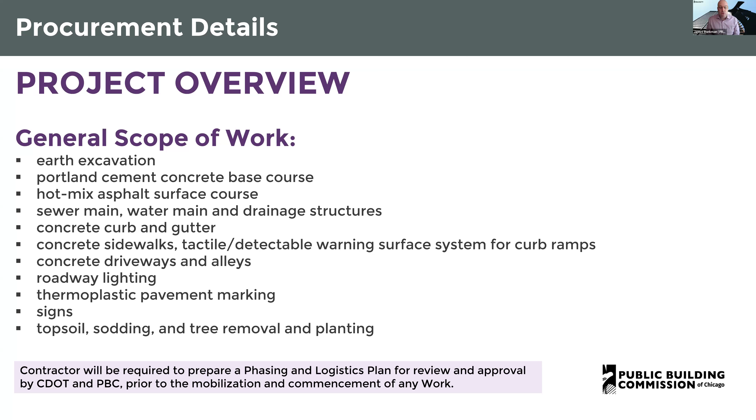We'll briefly discuss this now, but in Robert Ochi's presentation in the tech review, we'll go into detail about the specific portions of the scope of work we want to highlight for each project. As you all know, the contractor is required to prepare a phasing and logistics plan for review by the PBC and CDOT prior to any mobilization or commencement of work on these projects.

The time of completion is as follows: substantial completion no later than October 31st, 2025. There are two scheduled milestones. The first is the permitting of mobilization and site control - work may not commence sooner than February 11th, 2025. The second scheduled milestone involves the landscaping, the fall planting season - work cannot commence any sooner than October 1st, 2025.

Failure to achieve these scheduled milestone dates results in the following liquidated damages: $1,000 per day for failure to achieve substantial completion, and $500 per day for failure to achieve each of the milestone dates. All the documents are available.

Is someone off mute? Have a question?

All of the documents are available on the PBC's current opportunities page, located right on the PBC's website. You simply go to current opportunities and then find contract C1617, the WPA Street 112th and Loomis page. All of the plans, the tech specs, what we call Book 3, are available from Aloha Print Group. Simply click on alohaprintgroup.com/planroom C1617.

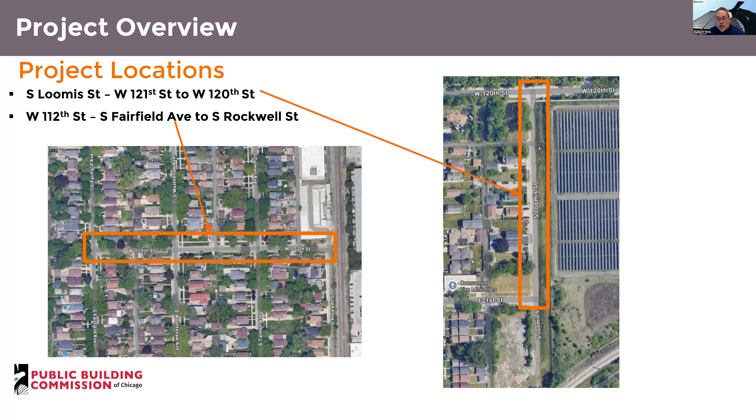Thank you, James. So as James had mentioned, there's two project locations. South Loomis Street is the first project, and West 112th Street is our second project. So you can see those identified in the little screenshots there. We'll start with South Loomis Street, basically from West 121st Street to West 120th Street.

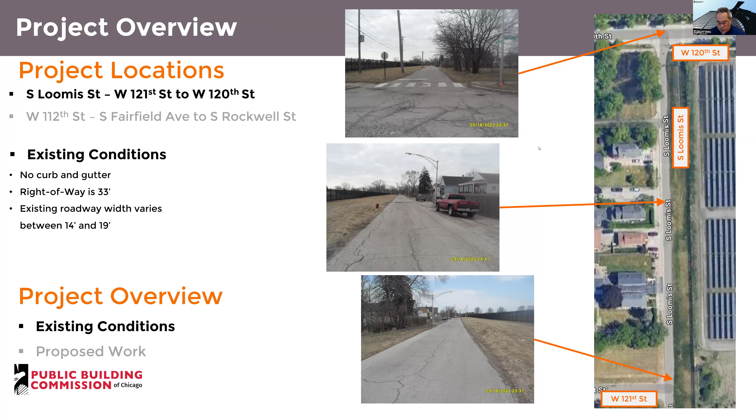Existing conditions, as you can see a couple pictures there. Existing roadway pavement and west parkway are in poor condition. No curb or gutter, leading to inadequate drainage. Right-of-way is only 33 feet. Existing roadway width varies between 14 and 19 feet. Primary residential, Exelon generation solar field property is adjacent on the east side of our project site.

There are sidewalks, but they are in very poor condition on the west side of the project site. There were 4 driveways and 1 alley apron within our scope, and vehicles are currently parked in the West Parkway, as you can see there on the overhead view.

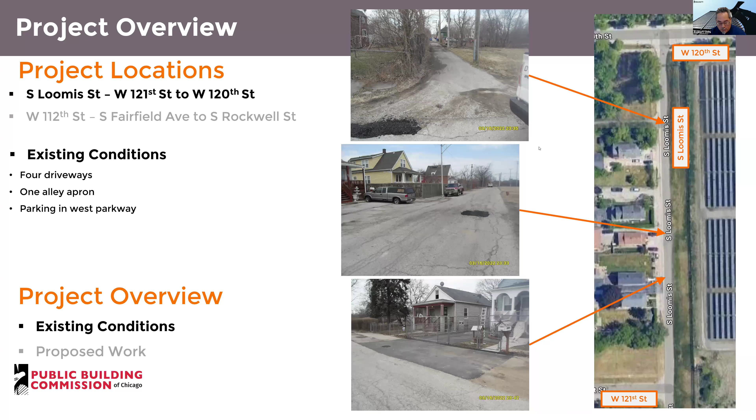If you go to the next slide, this has to do with environmental reporting. The environmental report can be found in Book 3, Appendix C, Part 2 of our contract documents. There are 2 borings sampled, and the soil disposal classification is landfill, non-special waste.

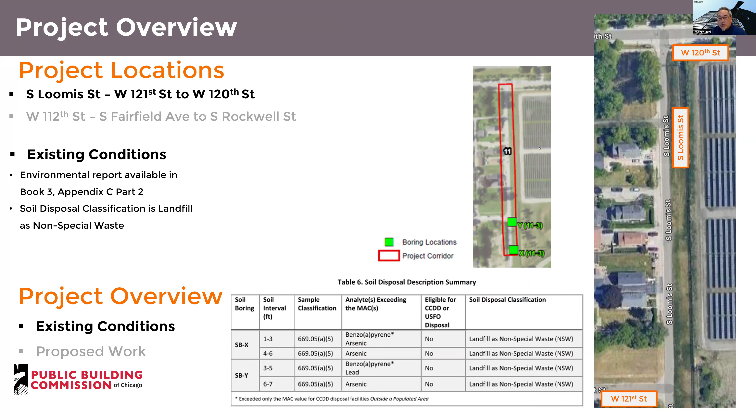We get to the proposed scope of work. This is a full depth pavement reconstruction project. Roadway to be 18 feet wide with curb and gutters. There are 2 catch basins to be installed with 6 feet total of lateral 8-inch ESVCP to connect to the

existing 24-inch sewer to remain. There is 1 manhole. There's 36 feet of 18-inch ductile iron pipe and 19 feet of 24-inch ductile iron pipe to be replaced at West 121st Street due to water main work.

Reconstruction of 1 alley and 4 driveway aprons are part of the scope. Construct 5 parallel parking stalls as shown on the plans to allow for parking on the west side of Loomis. And we are reconstructing 2 ADA corners at 120th Street.

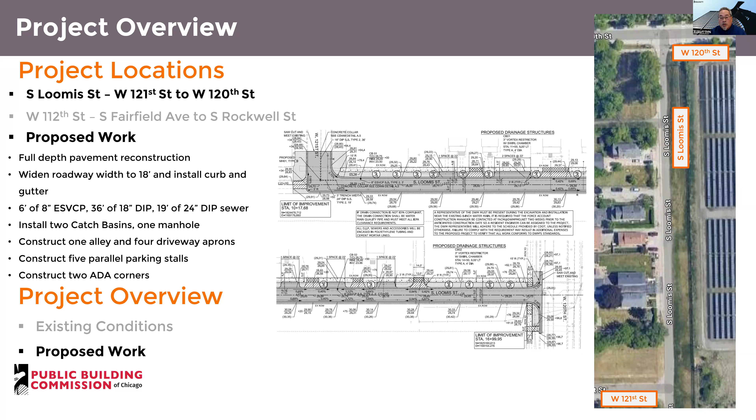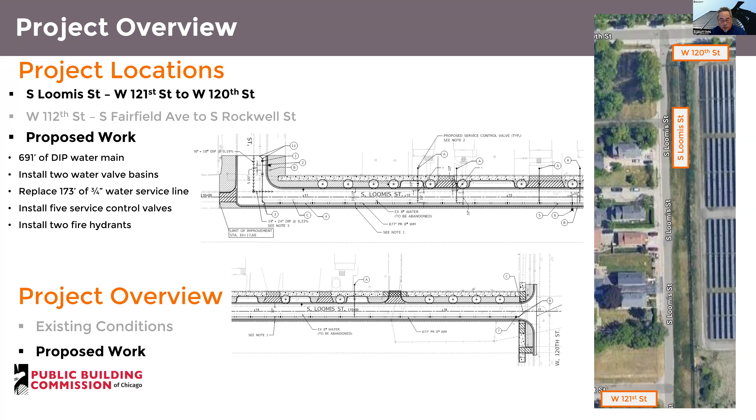This portion has to do with the Department of Water and the water main. We are approximately installing 691 feet of ductile iron pipe water main to be installed throughout the length of the project limits. We are replacing 2 water valve basins, replacing 173 feet of 3/4 inch lead water service lines, and 5 service control valves, which are the B boxes. And we are replacing 2 fire hydrants.

Primary residential, self-storage business adjacent on the north side of the east project limits entrance, present on the north side of South Rockwell Street. There is a sidewalk on both sides of the street throughout the project limits, except on the north side between the alley east of South Tallman and South Rockwell Street. And there are 10 driveways and 3 alley aprons.

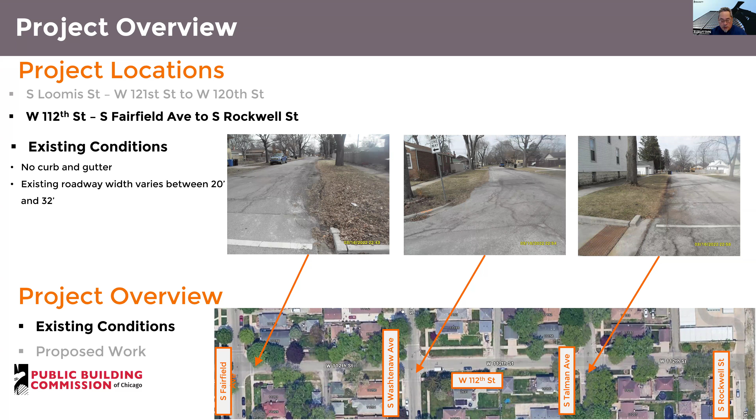The environmental portion of this: the environmental reports can be found in Book 3, Appendix C, Part 1. There is 1 boring sampled, and soil disposal classification is landfill, not special waste.

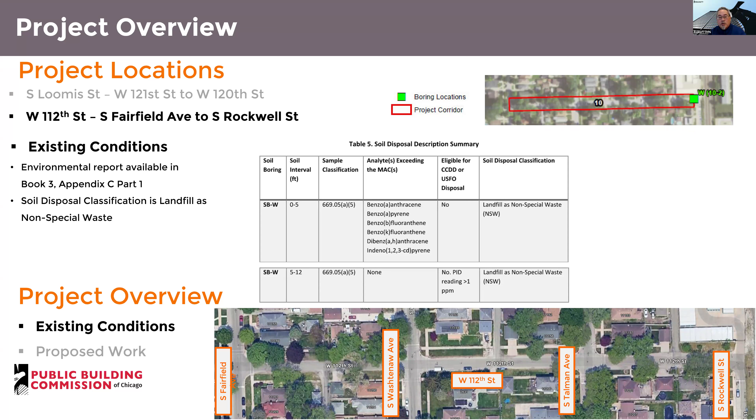Proposed work. There is a railroad east of 112th Street at the Rockwell intersection. Because of this, proposed work will take place within 50 feet of the railroad, the contractor would be required to have railroad liability insurance, and that'll be clarified in the addendum.

The project will also have full depth pavement reconstruction. Roadway will be 30 feet wide with curb and gutters. Pavement to be resurfaced at South Fairfield Avenue. There'll be 8 catch basins to be installed with a total of 43 feet of lateral 8-inch ESVCP and 95 feet total of 8-inch ductile iron pipe to be connected to the 24-inch existing sewer main.

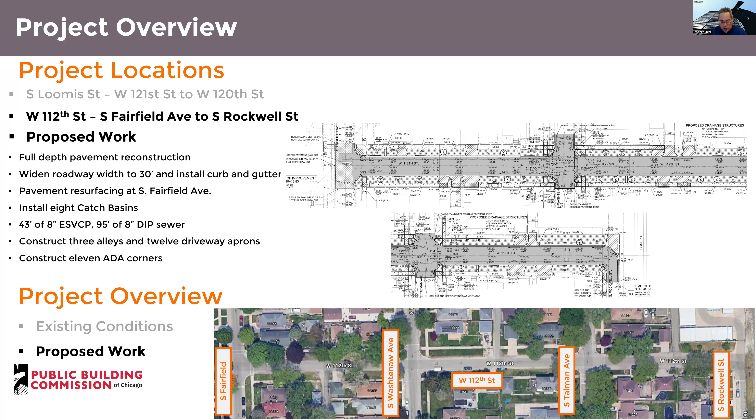We're going to reconstruct 3 alley and 12 driveway aprons and reconstruct 11 ADA corners. There's approximately 419 feet of ductile iron pipe water main to be installed between South Fairfield Avenue and South Washtenaw Avenue. We were replacing 2 water valve basins, replacing 68 feet of 1-inch lead service line pipes and 2 service control B boxes. And we will be replacing 1 fire hydrant.

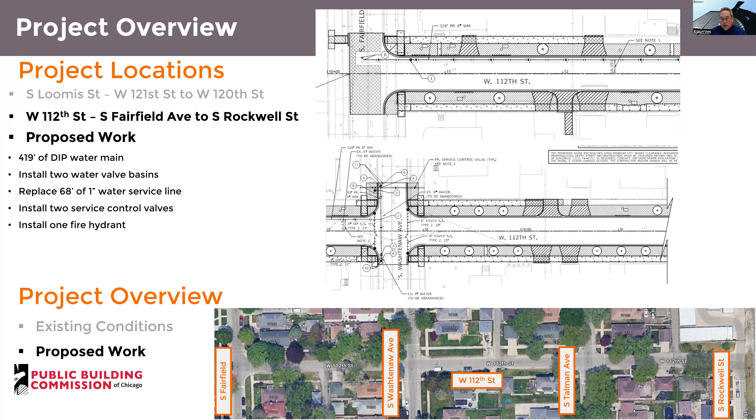For both project locations, South Loomis Street and West 112th Street, proposed landscaping: refer to the contract documents for removal and protection of existing trees and root pruning limits. There will be new trees to be planted in the parkways. Also, new grass sod to be placed in the parkways.

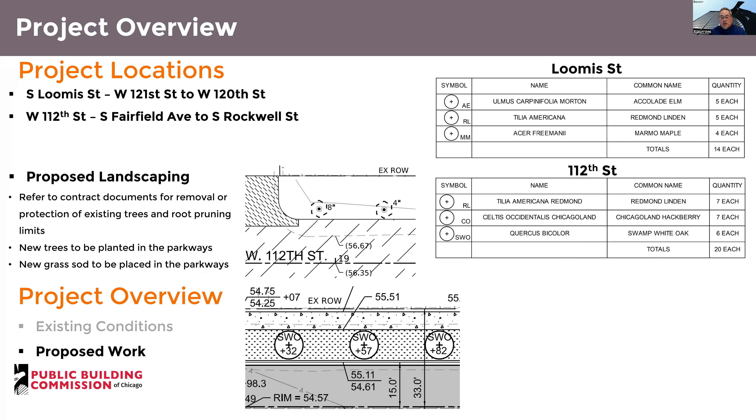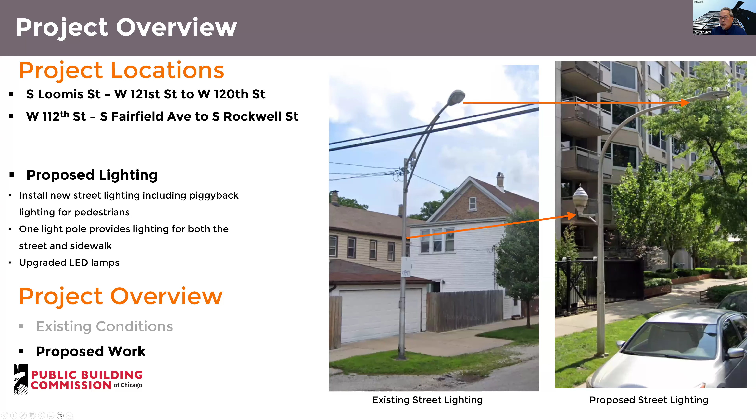For both project sites, there'll be proposed lighting. We will be installing new street lighting, including piggyback street lighting for pedestrians. 1 light pole provides lighting for both the street and the sidewalk, and we will be upgrading LED lamps. So that is basically the scope of work for these projects.